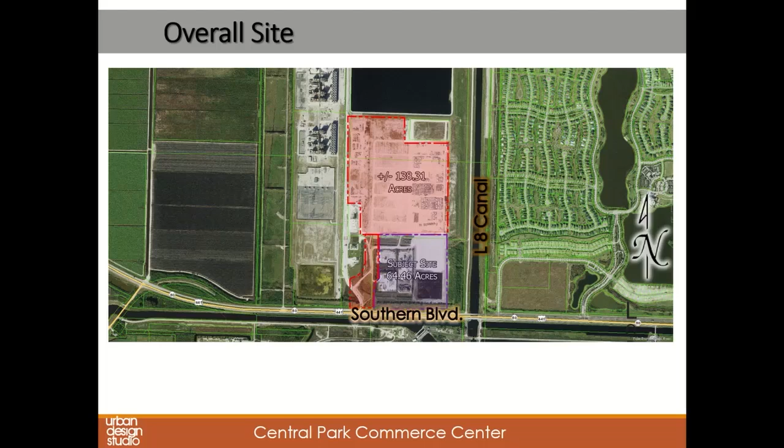The 64.46 acres that we're proposing to incorporate into the overall MUPD is located south of and east of the access and the developable portion of the existing MUPD, and west of the L8 Canal. Again, we're just asking to rezone the 64 acres to MUPD and to reconfigure the master plan to add the acreage.

This application requires text amendments to the comprehensive plan, as well as a change to EDC for this land use area, which was transmitted by the Board of County Commissioners on May 1st with a 7-0 vote. That included changes to the policies and the map, changing the land use to EDC, and also expanding the LUSA, the Limited Urban Service Area boundary, to include this acreage, as has previously been done for the approved MUPD. Again, that's exactly what the land use amendment was requesting.

While we do have a recommendation of support from staff on this, there are some conditions we're going to be speaking to later that we would ask for your consideration and input on. I wanted to go over the conditions in the land use ordinance that's being amended, because they do have some impact on those conditions we're going to be discussing.

The first limiting condition in the land use ordinance had to do with traffic and the amount of square footage and trips that could be constructed on the property. We are not amending that condition, so there's no increase in intensity from a land use standpoint to what was previously approved on the 138 acres.

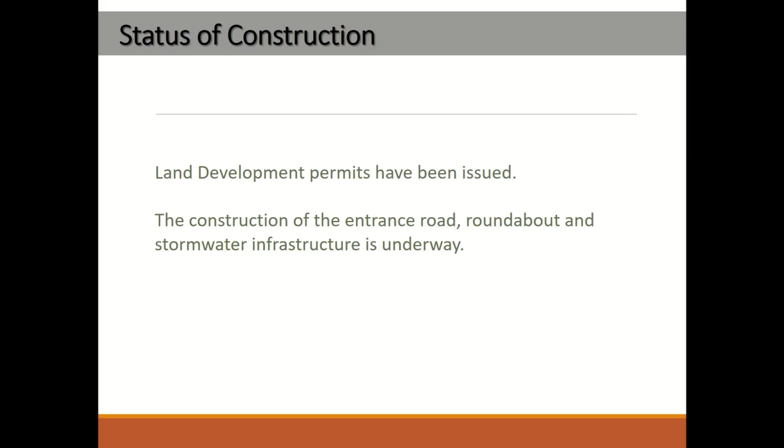Again, land development permits have been issued on the existing MUPD, and the construction of the entrance road, the roundabout, and stormwater infrastructure is underway.

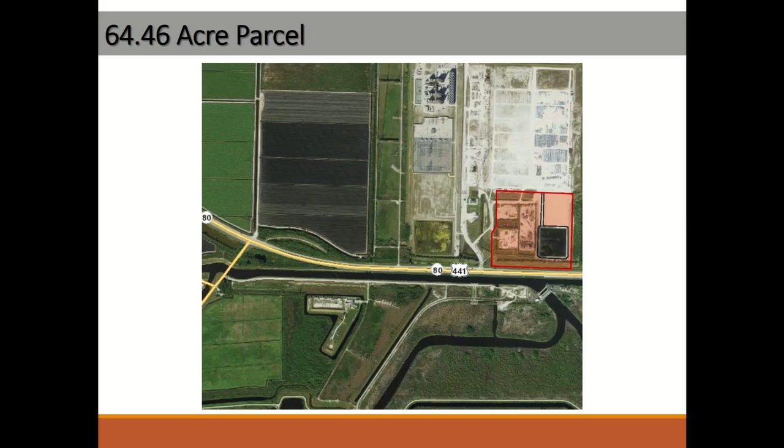You'll see in your staff report that there are some uses on the 64 acres that are going to be vested and will continue to operate. They're accessory uses to the mining operation, which at this point I believe is valid till around 2036. They include asphalt and concrete batch plants, which will continue to operate on this land area until such time as the mining operation ceases or the leases are terminated and new EDC use is constructed on that property.

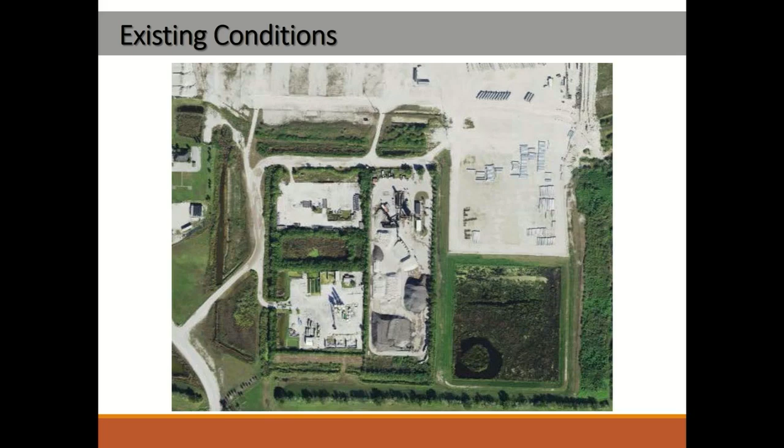They will be considered legal nonconforming, and staff has agreed to that in your staff report.

Again, surrounding uses: you've got Arden to the east of the L8 Canal, the FP&L power plant to the west of the MUPD, South Florida Water Management District and the reservoirs to the north.

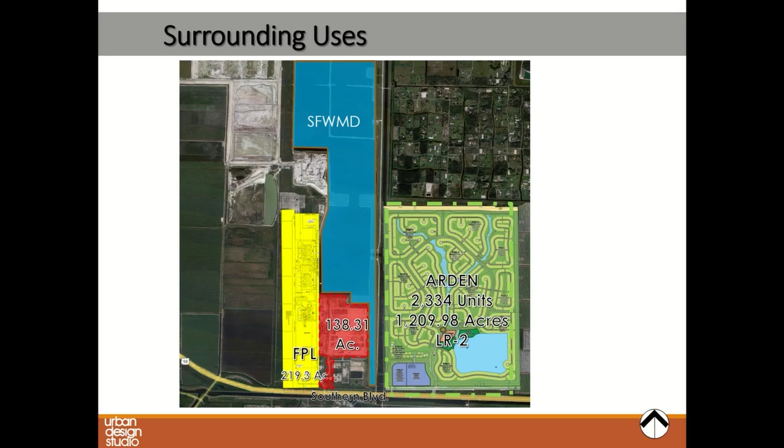Again, the surrounding uses in the area: FP&L to the west, South Florida Water Management District, and the Palm Beach Sheriff's Training Facility to the south.

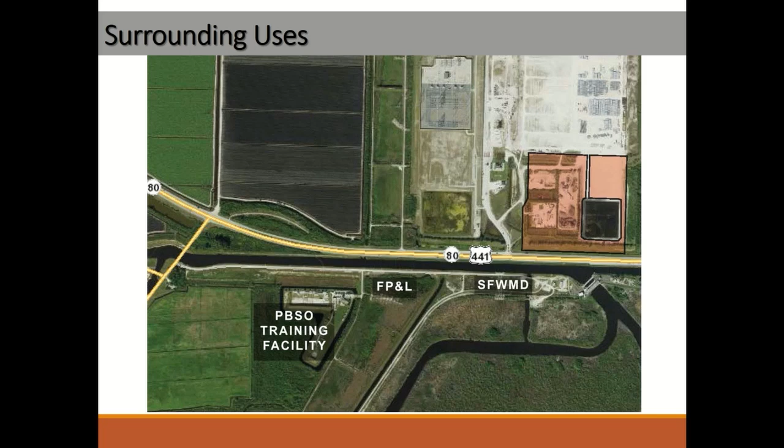I did want to point this out. The ULDC was amended some years ago to allow for the Board of County Commissioners to consider requiring a civic site dedication. The actual code language reads: the BCC may require that a portion of the gross acreage of the development be dedicated to Palm Beach County for public purposes when insufficient facilities are available to allow for the provision of government services required for the proposed development.

No request for a civic site dedication was made of this project when the MUPD came through originally for the 138 acres. We are assuming that was because it was determined at that time that there was no need for services created by this development, and our position remains the same with the expansion of the 64 acres.

Again, this is a non-residential development. It will not have residential units on it, where you typically see civic sites for schools, fire stations, libraries, all of which are actually being constructed to the east of this property.

There is an approved site plan that we're entitled to implement today for data center and warehouse uses, and we are not increasing the traffic associated with it.

It's also the 64 acres in question that are located behind a large berm along Southern Boulevard, which was done in part to help screen the FP&L facilities from Southern and the traffic there.

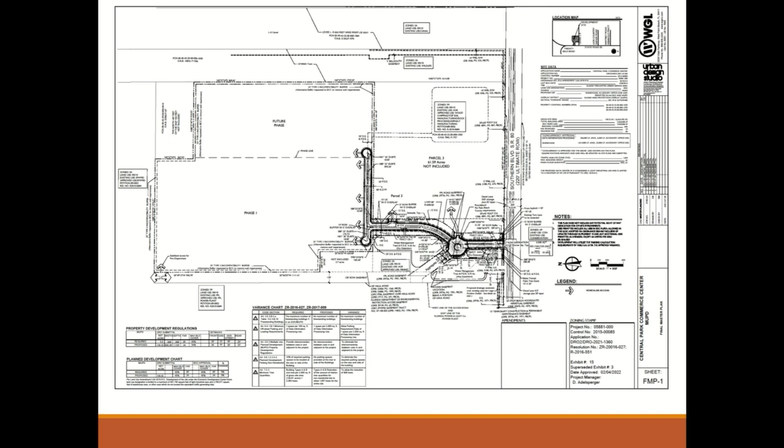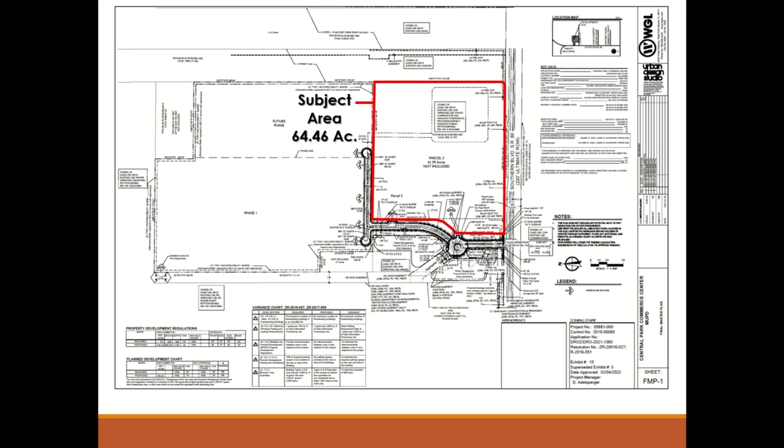This simply shows you the master plan that was approved and the 64 acres being added along Southern Boulevard. There is an existing stormwater pond already constructed in that area as well, that will be released in the future via a future replat.

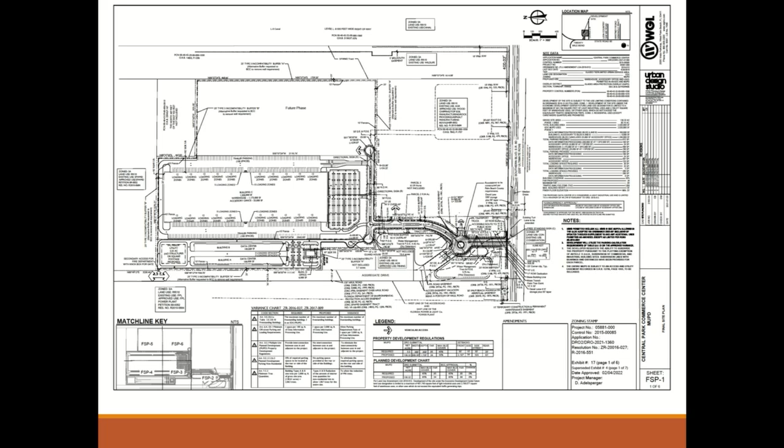This shows the site plan already approved for the data center and a utility function on the bottom left of the screen, with a warehouse already approved, entitled, and allowed to be constructed today, plus the 64 acres that are going to be incorporated into the site plan. The site plan is allowed to be amended later as users come on board, and that will be done via an administrative process.

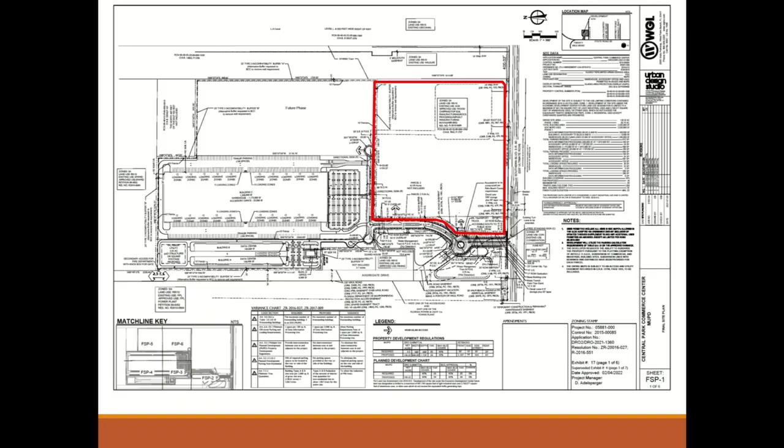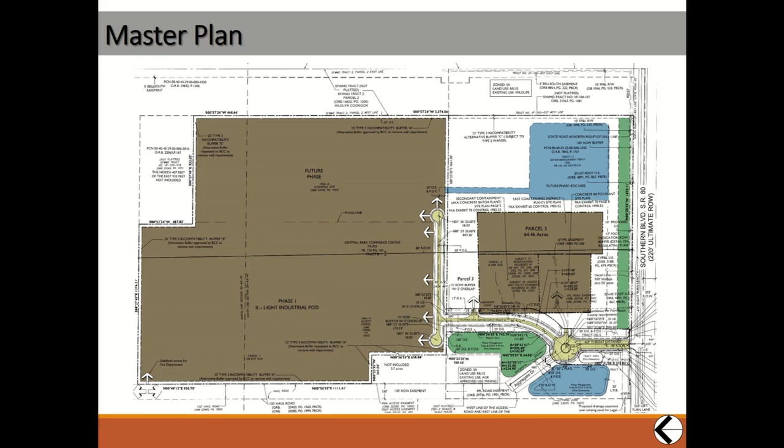In regards to a potential civic site dedication, the brown area to the left is already entitled for our MUPD, where we have the ability to construct our approved intensity, so in our opinion that should not be considered in any of these discussions. The brown to the right are the batch plants, the concrete and asphalt batch plants, which will remain on site for a considerable amount of time we're anticipating. The blue to the north is that existing pond, and the green and blue to the south are off-site drainage facilities that are also associated and approved with plats for this development.

Staff is recommending approval. We agree to all the conditions with the exception of PREM conditions 1 through 4. We are asking a recommendation from the Zoning Commission that the BCC not require a civic site dedication specifically for this project, because we do not feel this project is creating any need for additional government services. That ends my presentation. I'm sure there will be questions. We'll be available, and I believe staff probably has a presentation.

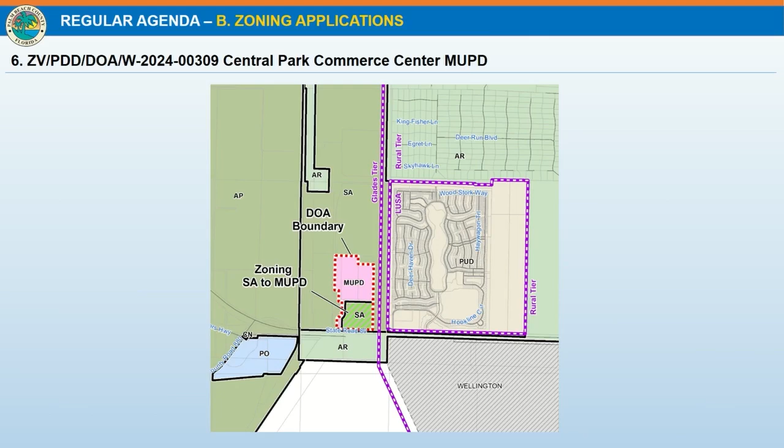The preliminary master plan for the Central Park of Commerce is being revised at this time to add the land area only, and the site plan will be amended subsequently in the future when the applicable EDC uses are established. The Central Park of Commerce MUPD has an existing approval for 2,020,000 square feet of warehouse and data processing center as EDC uses. The addition of this parcel will allow future expansion of these EDC uses.

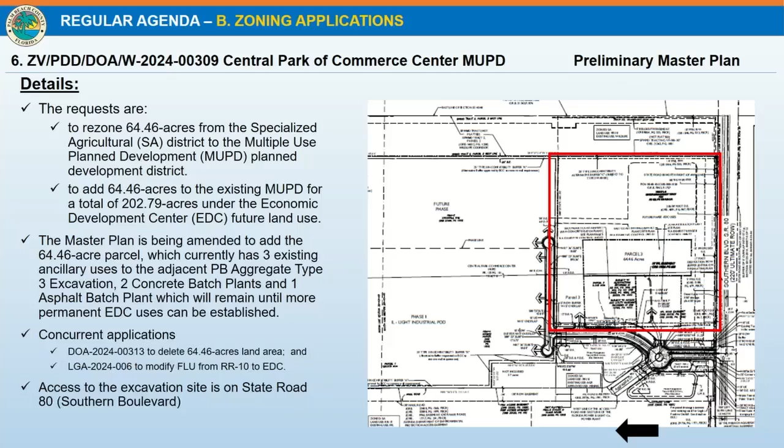In accordance with the proposed conditions of the large-scale amendment, the site can expand with the allowable EDC uses to a total of 3,278,000 square feet. At the time of publication, staff had received 6 phone calls from the public just asking for clarification and more explanation on what the project is, with no objections.

Staff recommends approval of the request subject to the conditions of approval in Exhibit C1 and C2. This concludes my presentation, thank you. I'll make a correction: the future land use amendment has a restriction on the square footage, 2,700,000 and something. They won't get up to 3 million, so that is incorrect. Okay, thank you.

All right, do we have comments from the commission? Comments, questions? You start with Commissioner Kennedy. Do you have anything? No? Okay, Commissioner Vinegar. Yeah, a few things.

About the civic site dedication, we can't let that go. It would have been 4 acres altogether, correct, with the previous parcel and the 2.77 acres from the previous parcel, and then 1.29 acres from the 64 acre, correct?

It would have been 4, and I can see that with the previous approval we'll let that go, the 2.77, but the 1.29 that we're discussing here, I know I discussed with Joni. We have this sheriff's firing range there. It is owned by Palm Beach County. And I see I have facilities here.

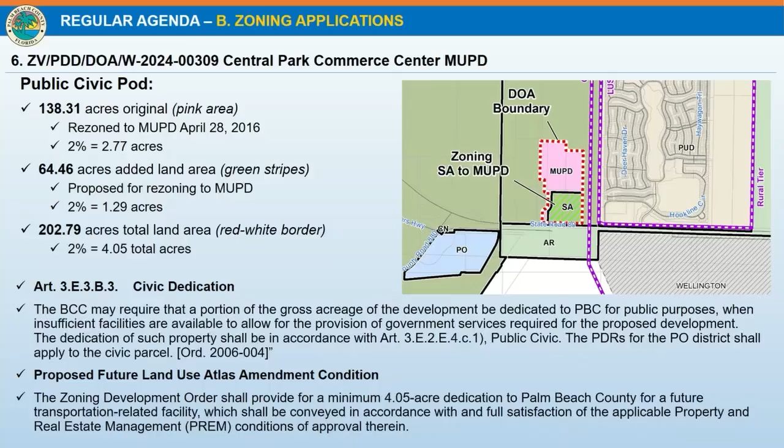So with that, based upon a combination of institutional knowledge as well as outreach and coordination to end users, we have identified interest from Palm Tran in a park and ride facility at this location, which would be the midpoint between their eastern and western points of service along their southern boulevard route. We've also become aware recently of a truck parking deficiency issue in the central western communities that has received some interest and some attention, and the fact that this project will have over 2 million square feet of industrial entitlement.

We feel there's reasonable potential for additional truck parking needs to arise as a result of the project. And then also there was reference earlier to the PBSO Sheriff Shooting Range. Over 200 acres approximately around that facility have been directed by the Board of County Commissioners to be put on the street through an RFP for a potential race or OHV park. So leveraging the transportation assets that could occur here, we feel that there could be some possible utilization as well.

So really the threshold question here is, does the board see this as an opportunity to require a dedication? And I do not speak for the board. If the answer to that question is yes, at the board's discretion, the next consideration becomes the acreage. And as Ms. Vinicor was alluding to, typically you would apply a 2% standard to the affected area of an application. Applying that to the roughly 64 acres in this case would yield about 1.2 acres. From our experience, 1.2 acres really is deficient to deliver any public facility.

And in the ULDC, we have a standard of 1.5 acres from which to require a dedication. However, with the companion land use and text amendments, that is a vehicle for the board to determine the acreage that they would like to identify should they see this an appropriate and responsive opportunity for a dedication. So with all of that as background, the conditions that are on pages 13 and 14 of the staff report do reflect the hypothetical 4.05 acres if the board were to decide they wanted to apply that to the entire property as a condition of the land use change that is being requested. That acreage figure obviously could be adjusted downward, upward, or the conditions deleted altogether at the BCC direction.